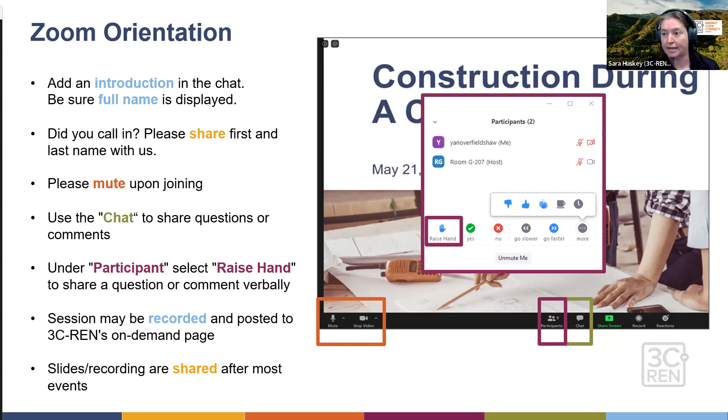So a brief introduction of who we are. We are the Tri-County Regional Energy Network, also known as 3C Ren. We are funded by ratepayer dollars through the public goods charge found on utility bills. And the benefit of being ratepayer funded is that there's no cost to those we serve, and we are able to return these dollars back to our local economy, which has historically missed out on some of these funds.

So our services have grown from the last year. We now offer 6 programs focused on 3 distinct services. We have incentives, training, and technical support. Our incentive programs are home energy savings and commercial energy savings, which offers incentives for single family, multifamily homes and commercial businesses. We have our training programs, our building performance training and Energy Code Connect, which offers live and on-demand trainings.

And through our Energy Code Connect program, we have our Energy Code Coach service, which answers residential and non-residential Title 24, Part 6, Part 11, also known as CalGreen, questions for those projects. And then we have our technical assistance programs, which offers customized audits for critical facilities. That's for our energy assurance services program. And then we have our utility bill reviews and site assessments for farmers through our agriculture energy solutions program.

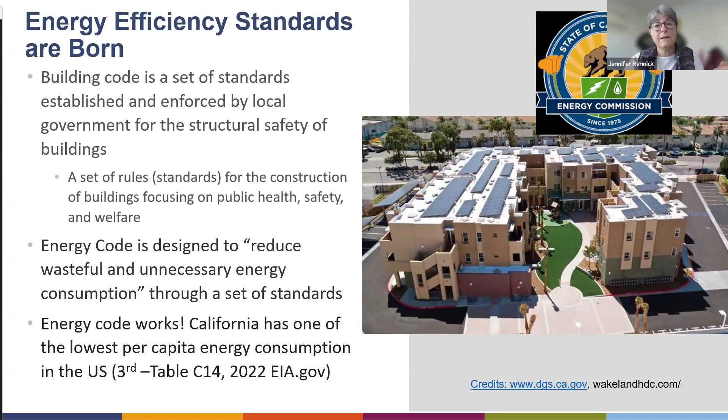And so this is an example of a project that was one of the first multifamily platinum LEED buildings. And really what this project showed is that you could incorporate enough solar panels on a roof to offset 90% of the electricity needed for all of these tenants. And at this time, it was still the most common to use natural gas for their water heating. But as far as it came for the space heating and other electricity, you could see that it could be done with solar panels. And then our energy code has gone up from there, as well as exemplary examples have gone up from there.

So 1978 was when we had our first energy code, and we refer to it as Title 24, but it's the Energy Code, Part 6 of Title 24. And then 2008, we started to develop an energy efficiency strategic plan for the state. So soon thereafter, 2010, we have another part of Title 24, Part 11, and that's the CALGreen Code. And then in 2020, with the implementation of our 2019 Energy Code, we started to require photovoltaics, solar panels for homes, and then that expanded to the non-residential occupancies in 2023, which is part of our current 2022 Energy Code.

Legislation was also passed along the way that requires California to have a 40% reduction in greenhouse gas in the buildings and 100% carbon-free electric generation by 2045. So it's been a steady process, but the California Energy Code has helped bring about California's low per capita energy use and great reduction in pollution, but also saving our state billions of dollars for not having to build new power plants. Although with the shift towards moving towards all electric, we do need to build solar power plants.

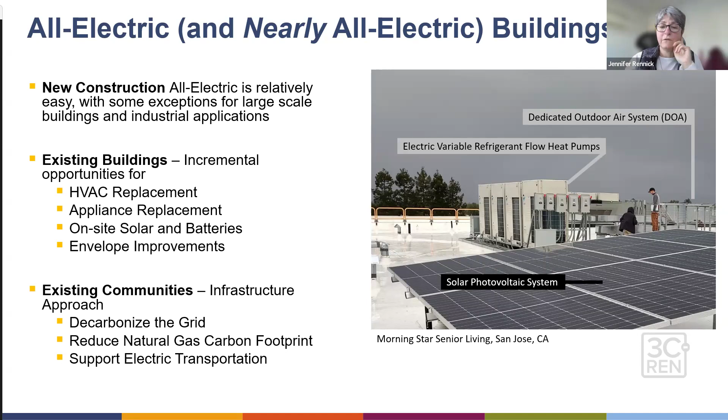Now, in terms of the energy code itself, it fits into California's Code of Regulations. And so there's 28 titles comprising the rules and regulations, and there's about 200 regulatory agencies. Title 24 is the Building Standards Code. And Part 6, the Energy Code, is just a portion of that. Part 11 of Title 24 is the Cal Green Code.

But also, back when this work was being done to look at energy efficiency in buildings, the California Energy Commission also was looking at the energy efficiency of appliances. And so that is under Title 20, which also includes what we use in our buildings, small heating and cooling systems, and all our appliances. And then Title 25, housing and community development, that comes into play, of course, with our housing, but also a lot of talk about ADUs and adding ADUs or manufactured housing. And I have a slide to address that towards the end.

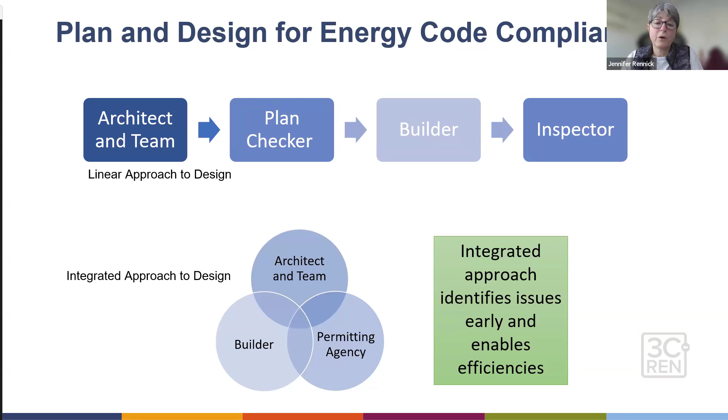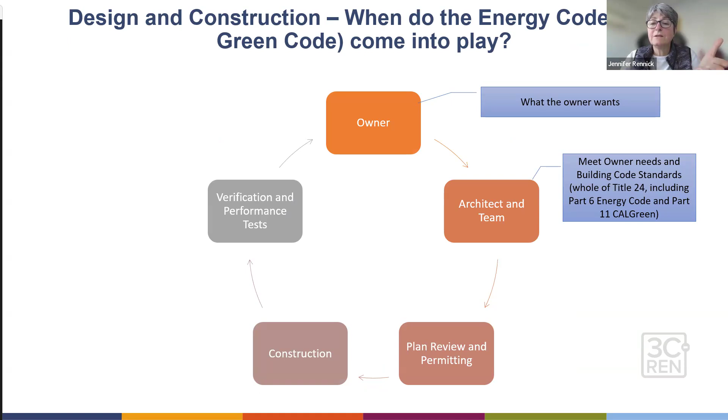And because the energy code now is very integrated with the building itself, it behooves us to do an integrated kind of approach to design. And so what that could look like is that we're looking at what the owner wants, and then the architect and the design team needs to meet Part 6 of the energy code and Part 11, the CALGreen Code. They should be looking at it at that time. Then they're going to have plans and specifications that reflect those early decisions. And that part of it could be a bit iterative with the design team and the engineers and working with your construction crew, but it is an integrated design process.

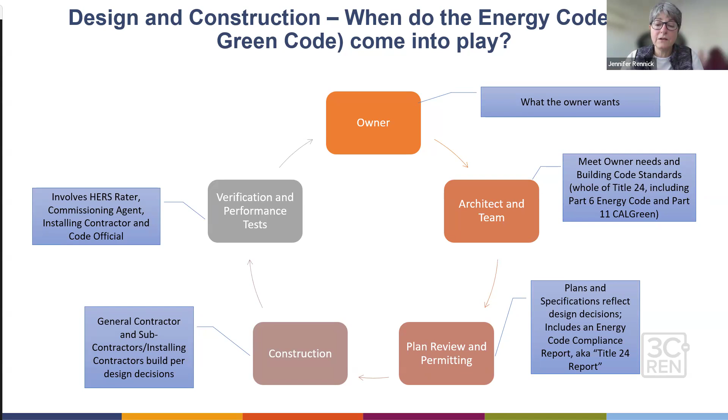And you'll want to elicit it if you know who the builder's going to be, get some of their feedback. And then for single family homes, there's going to be a verification process involving HERS raters to show that parts of the energy code have been met. If it's a commercial project, you may be involved with a commissioning agent, and also installing contractors and code officials all play their part in this verification and performance testing part of the process. And then really that behooves the owner because they will know that their project complies with the energy code and CALGreen Code.

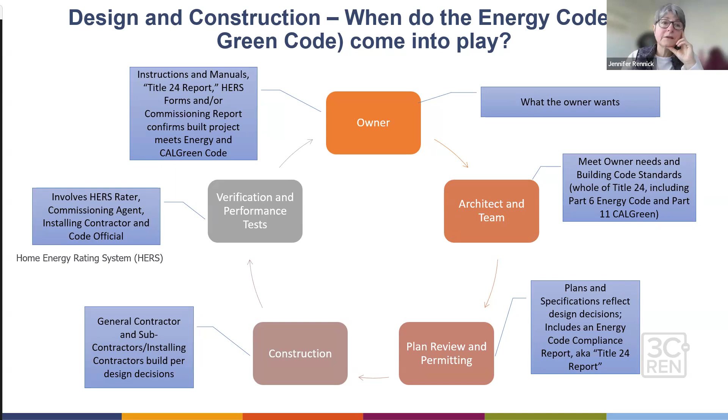Okay, I think that was a lot, but also kind of bigger picture context of where that energy code fits in and where some of the resources are. And then we're going to take a closer look into Title 24 itself. I can pause for a moment if there's any questions in the chat that haven't been answered by Grant or Andy.

There's one question, I was just answering it. Adam asks if HERS ratings are only for residential. Yes, they are only for residential. Non-residential has what's called acceptance testing, and acceptance testing is required to be completed by an acceptance test technician. The amount of jurisdictions requiring that and following up on that is a little shaky at this point. We found that some are on top of it and some aren't. And in some cases, depending on the test required, they have allowed HERS raters to complete that work. But to answer your question, HERS is only for residential.

And then to make things more fun, in the new code coming up, 2026, next year, they're going to get a new acronym. Just put a pin in that. We're going to just stick with the 2022 code right now. Okay. Thanks, Grant.

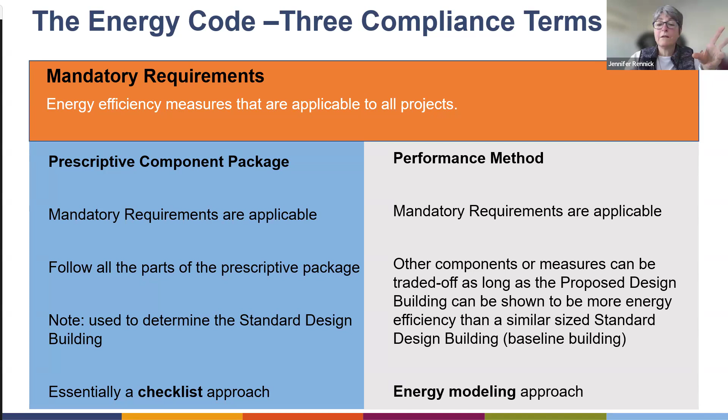The other thing to know in California, and I alluded to that, is that it's climate zone based. California has looked at a lot of the microclimates and divided the state into 16 separate climate zones. And just FYI, for those of you from out of state, you might be used to looking at ASHRAE's climate zones for the whole country. Those climate zones are completely independent and separate of California's climate zones. And for any architect on the call, that really comes into play, as a sidebar, in some of the assemblies that show up in Part 2.5 of Title 24.

Oftentimes California uses the ICC code, and that references both the whole country's code that ASHRAE uses and the California code, these 16 climate zones. It's a lot to remember if you're brand new to the code, but put a pin in that. Most of the energy code is going to be referring to these 16 climate zones. The rest of Title 24 might actually be referring to the other climate zones, meaning ASHRAE and the whole US. So just keep that in mind. But anyway, the California Energy Commission has an online tool, the Easy Building Climate Zone Finder, which helps you find your climate zone.

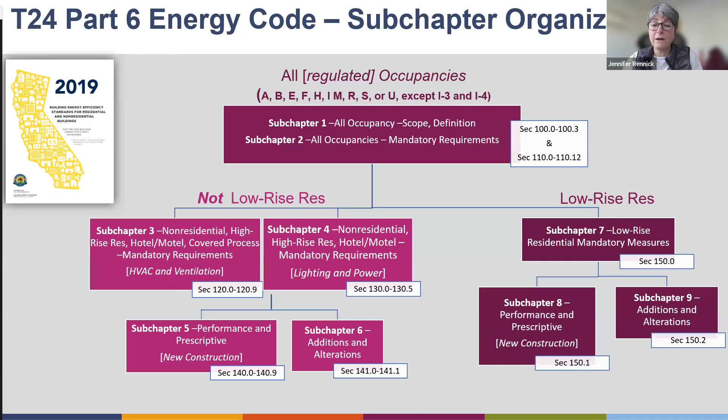So if you have the situation where you need to look up older code cycles, I put this in here for reference. This is the way those codes were organized. But now under the 2022 code, we have pulled out the multifamily residential projects, both low rise and high rise, and given them their own subchapters 10, 11, and 12. So it's organized now a little bit differently with 3 more chapters.

So we've got our single family section, still chapters 7, 8, 9, our nonresidential sections, still chapters 3, 4, 5, 6, and then the multifamily subchapters 10, 11, and 12. And then to make things a little more fun, that was sarcasm, to make things a little more difficult when you're new to the code, is that we often do not refer to the subchapters in the energy code. We refer to the sections.

So when we say section 150.0, we're really talking about the mandatory measures for the single family residences. And then we'll talk about section 150.1 specifically for performance and prescriptive new construction, and additions and alterations would be 150.2, for example, under the single family residential heading. Another little put a pin in it.

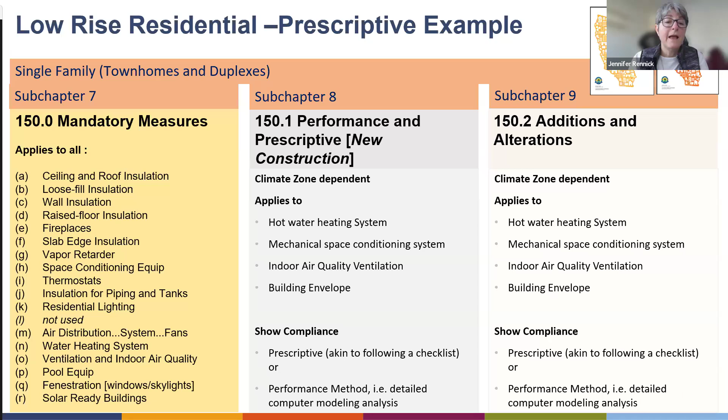So you would see under mandatory measures, there are A through R topics that are mandatory. At this juncture, L is not used, but otherwise A through R. And if we take a look at section C, wall insulation, that's going to start to tell us what's minimally required. But if I want to know more about that, I would need to go to section 150.1, building envelope, and then I would take a look at what the prescriptive measure is, and that's akin to following a checklist. Similar thing for additions, alterations.

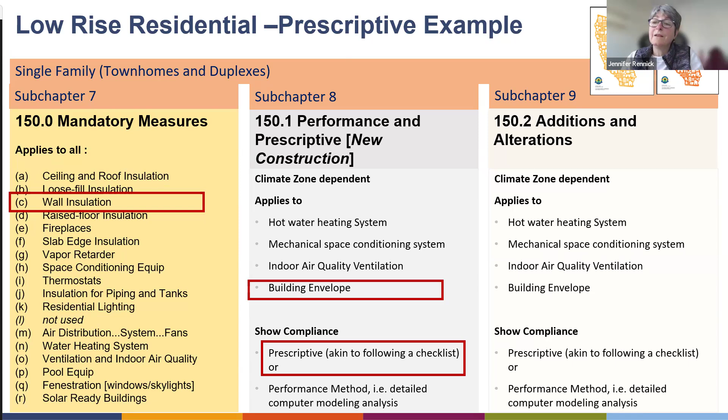If I go into that section of the building code, then prescriptively, I'll be presented with a table that lists out the component package requirements for building envelope.

And in this case, for the roofs and walls, that's the part of the chart that I excerpted. Let's say we take a look at climate zone 9, for example; we have a project in Thousand Oaks. Then I would come over here to the walls, and specifically above grade walls. And let's say I'm going to take a look at a wood framed building. What it's going to tell me is that a wood framed building in climate zone 9 in Thousand Oaks, above grade walls need to have a U factor of 0.048.

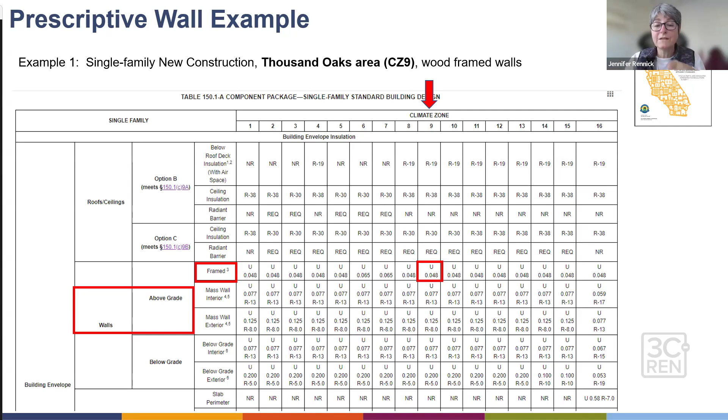So yes, you might be learning about the energy code, but now this is where it dives into, if you were an architect, you probably took your class on heat transfer. If you didn't have a heat transfer class, there are tables that translate this U factor into something in plain English you could understand, which is where you go into these reference appendices and your manual, and you can look up these requirements.

And for example, if you had a stud wall, 2x4, 16 inches on center, and you had cavity insulation of a certain R value and your cavity type, you may or may not need exterior continuous insulation, but it's going to start listing the U factors. Not exactly in this format, but there are tables in the reference appendices that kind of spell this out. And so really what we're looking at is what U factor for climate zone 9, for example, is going to meet the

0.048 or less. And in this case, the 3 examples at the bottom would meet it: a 2x6 stud wall with either R19 through R23 cavity fill, and you're going to have at least an R5 continuous exterior insulation. And that wall assembly now meets the prescriptively required wall assembly if you're going to do your building or your house by the checklist. Now, if you're going to do the performance method, this wall type would be used, and you can trade off, say, the exterior insulation for something else that's more energy efficient.

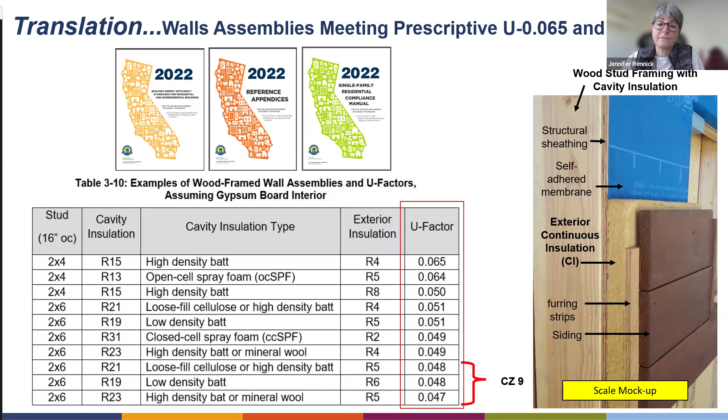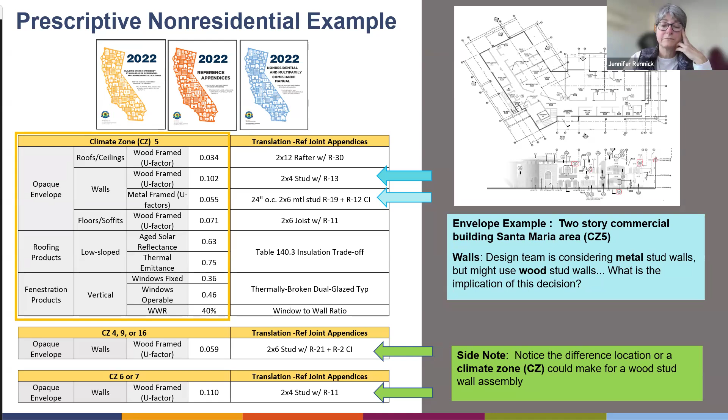So really, our energy code was trying to pull us away from metal stud walls, which have a lot of thermal bridging. You can still use them, but to meet the prescriptive, you would use continuous insulation around the envelope to stop the heat transfer through the metal studs. And that's for climate zone 5. When you change to a climate zone like 4, 9, or 16, which we have in our Tri-County region, even the wood stud wall would need some continuous insulation prescriptively. And if you move to climate zone 6 or 7 down by Santa Barbara, considered much more mild, you don't even need the R13. You could just use an R11 in a stud wall, for example. So climate zones make a difference.

Another piece to this, once you switch to the performance method, the computer modeling method, is that there's more than one metric. I had mentioned before, if your proposed building uses less energy than your baseline building, then it passes. But within those broad terms, what we're talking about is energy looked at in terms of efficiency, a TDV energy, and a source energy. The time-dependent TDV energy is expressed as energy use per square foot of the building floor area. It's a number that represents the annual energy used in the building, plus the additional energy that went into delivering energy to the building site. So transmission line losses, for example.

Source energy is another metric that is really trying to capture the impact of carbon emissions from the creation and delivery of that energy used. They're all listed as kBTU per square foot per year, but it's not an actual number you can translate into electricity use. Although the software can give you that number, the code compliance part of it is looking at what's called TDV energy and source energy. And if the proposed design uses less than the standard design on all of those, you pass.

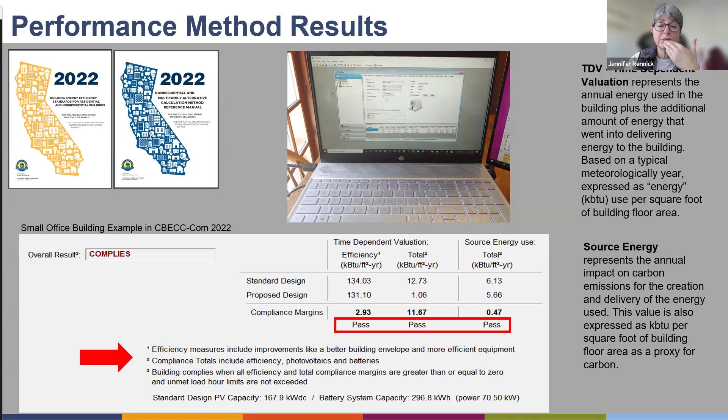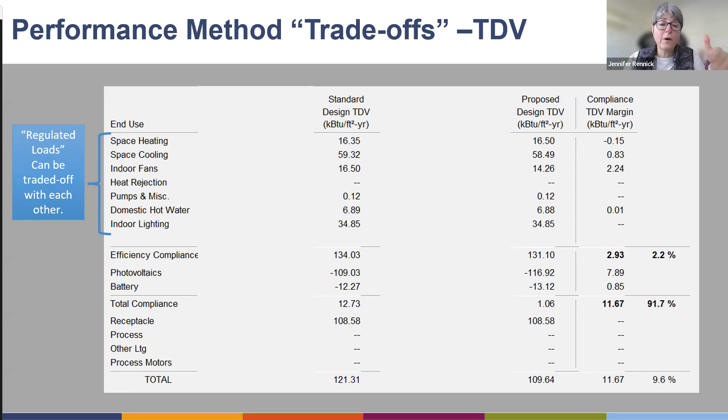Then for extra credits, or this other part of the total compliance, is your required photovoltaics and potentially required battery storage. If you exceed those and you do more PV, more battery than needed, you can gain a little bit on your compliance as well.

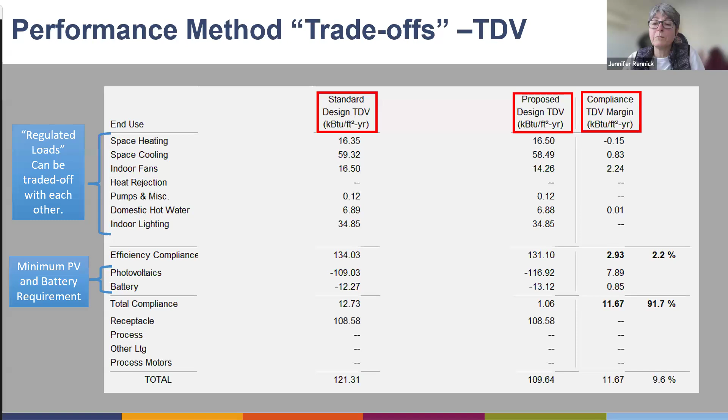So in this case, standard design is listed, your proposed design is listed, and then your compliance margin is listed on the output. And we can start to look at this as energy consultants or your mechanical engineer, whoever you're working with. If you choose not to take it on yourself, that's fine. This is a whole specialty in and of itself, but we can look at the building design once it's modeled and say, okay, there's some improvement that needs to be done with the space heating, but the way the project is designed, we're doing better on our space cooling and our indoor fans, and we're doing ever so slightly better on the hot water. And those positives outweigh the negatives. So overall, we have a positive compliance margin, and now we've met the efficiency part of the TDV.

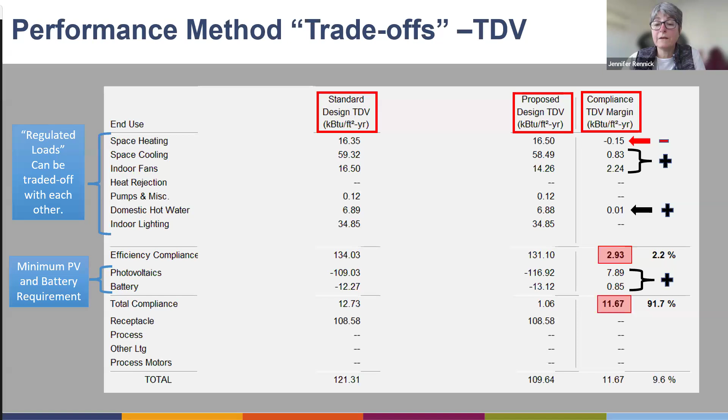And then we take a look at the total, and we've included positive on our PV and batteries by exceeding the standard slightly. And so now we know that we're doing fine on this building, and we can look for improvements if the building weren't complying.

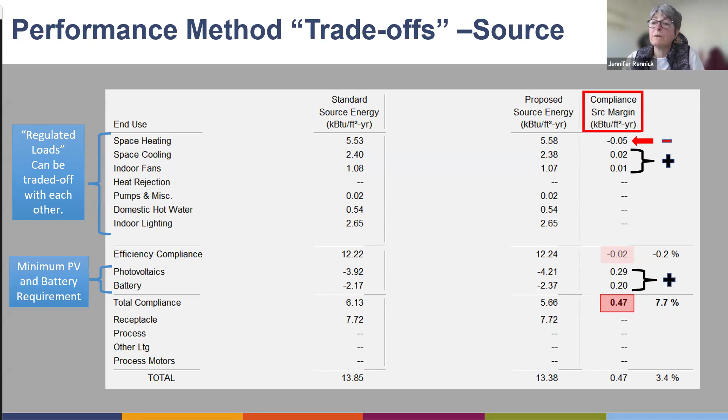Any questions about that? And I'm happy to go back. It's a lot if it's the first time you've looked at it, but it also maybe helps to demystify a little bit what your mechanical engineer or your energy consultant is looking at when they're trying to take the whole building and look at its performance in terms of how it's doing with the space heating and space cooling, because really that might tie back to what was chosen for the windows. What was the specification on the windows, and were those helping you? Or is more insulation needed? Or perhaps a more energy efficient heating and cooling system to help boost some of those core elements that are regulated by the energy code.

And then, are there any questions, Grant, that we can answer? Okay, no. Please send through any questions you have. We're happy to sit here and answer stuff. Anything you need more clarification on.